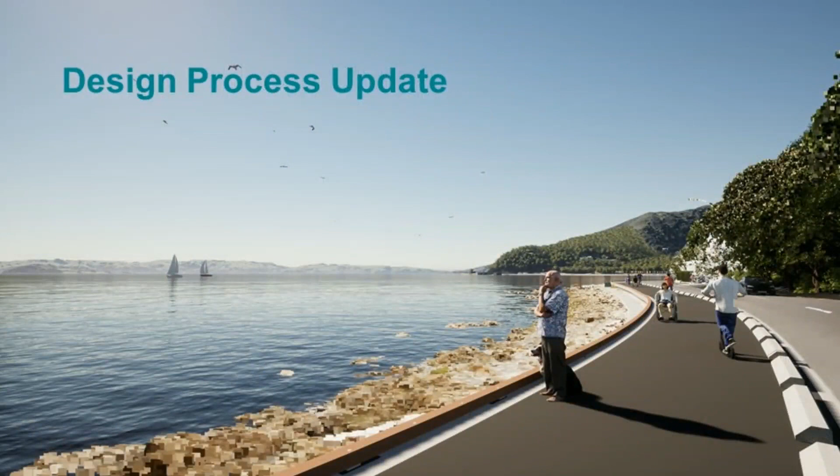That's really been an evolution of the consent design, which many of you are probably familiar with. Most of what we've done is in the engineering detail that sits under the ground, how we make it all stand up, how we make it work, and how we build it. So most of what we've done is probably invisible, even though a lot of hard work's gone into it.

But I just thought I might highlight some of the things that you might see that could be slightly different to what you had seen previously. One thing we've done, it's not super clear in this picture, but we've got a much larger landing between the levels of the wall now, and that was around providing safety from falling. The idea was it reduces the need for balustrades and increases safety for users, so they don't have as far to fall.

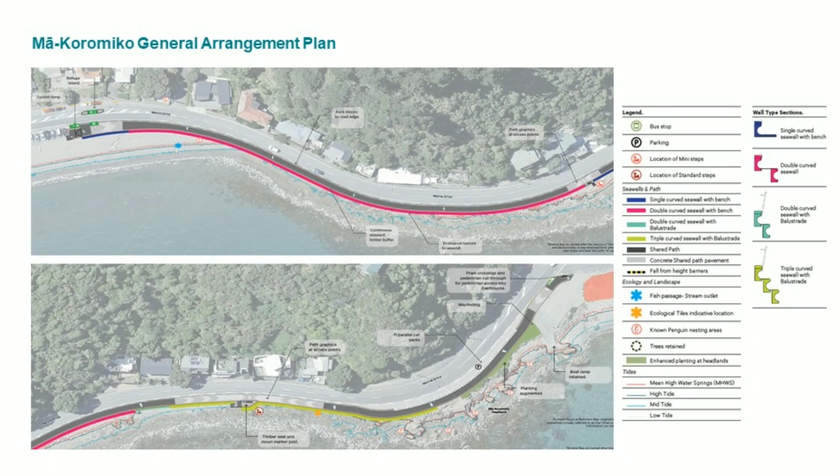These plans are now, or very shortly will be, going live on the Hutt City Council website - the more detailed plans that sit within that urban design plan. You can look a bit more closely at the design for those two bays in your own time, because this is obviously a bit hard to read. So either now or very soon they'll be up - they are now, they're on the Hutt City Council website. That's the update from design, and I'm going to pass over now to John.

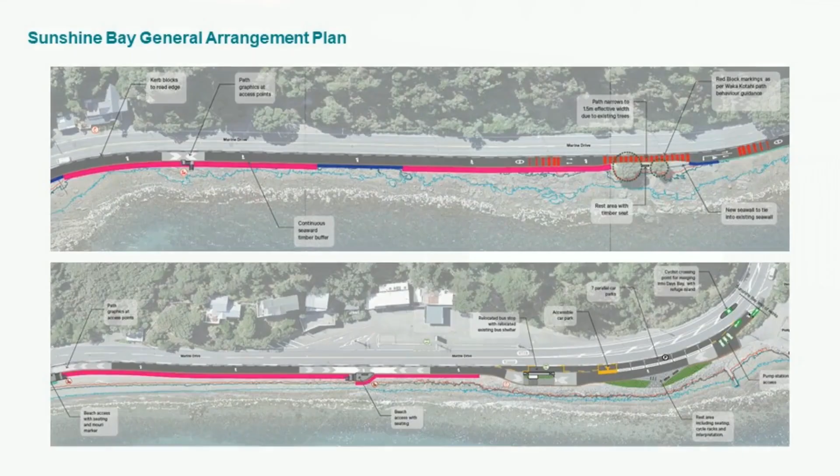Kia ora koutou. For those of you who don't know me, I'm John Kingsbury, Head of Transport at Hutt City Council. Just before I talk about this, I want to acknowledge the experts in the room.

The alliance that's been put together for both Tupua Horo Nuku and Te Ara Tupua is amazing. We've got the best of the best people, the real experts on this, so couldn't be prouder to be associated with either of those projects, with such great people involved.

I'm going to talk a little bit about the resilience benefits of this. Very topical, obviously, and I recognise a few faces from last week around the corner when we had a climate change event. The project will improve the resilience of Marine Drive through the new seawalls, and some of you may have seen the wave testing a month ago or so, which we can talk about a bit later if anyone's got questions. But basically pushing the waves back out rather than bringing them in.

The new seawalls will be less prone to damage in comparison to what's existing. Also have the potential for future resilience upgrade. We know climate change is real, obviously, and we know resilience is a key thing along the eastern bays. So it's not going to solve everything, but it will help, and it's a starting point.

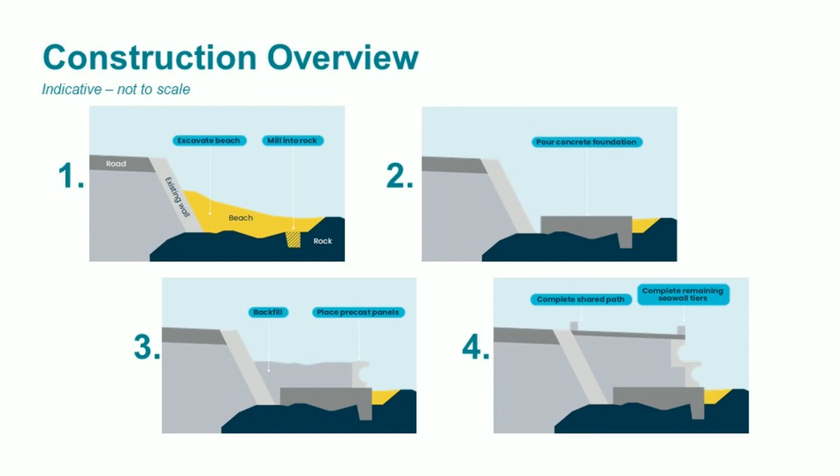So we've got an unreinforced concrete foundation that we pour into that, and on top of that we have the precast units that Michael mentioned earlier. They go in the front, they give us our temporary formworks, our permanent formworks, and a nice finish on the face of the wall, and again more concrete in behind that. Once we're up close to the level of the existing road, we slap a pavement on top of it, and that's pretty much job done for us.

So how are we going to do this? This job's really easy to build if it was in a field, it's just a big concrete slab. But we're stuck between a pretty gnarly marine environment and Eastbourne's only road access.

So we're going to be setting up a permanent lane closure throughout the duration of the job. The lane closure is going to be anywhere between 200 to 300 meters long, and this gives us space to work our lifting machinery, our concrete trucks, our delivery trucks for the precast. So we're going to be skinnying up the traveling lane down to about 2.75 meters, whatever we need to do to get the buses through.

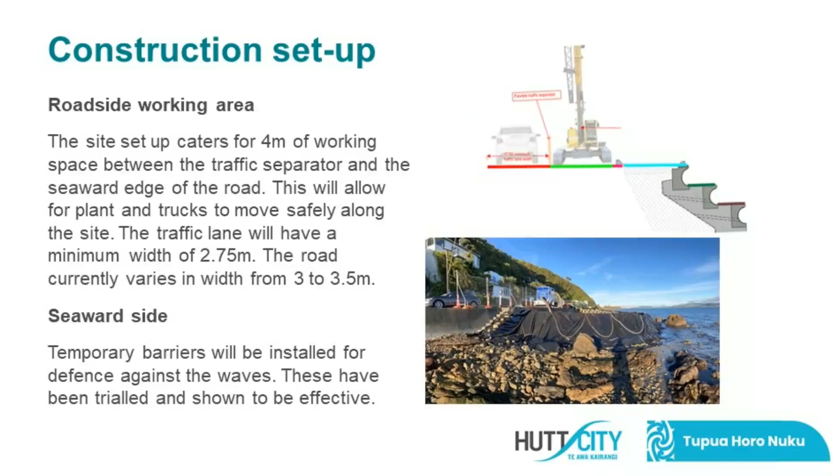Out on the seaward side, we're going to be using a temporary barrier that we're bringing up from Christchurch. The intention is to dampen the wave action and give us as dry a site as possible so we can build this thing as quick as possible.

The traffic management - as you'll see on some of the cheat sheets knocking around, during peak times and working times, the traffic management is going to be manned, so we'll be able to manage the ebbs and flows of the traffic depending which way they're going. Outside of those working hours and outside of those peak times, they're going to be automated signals.

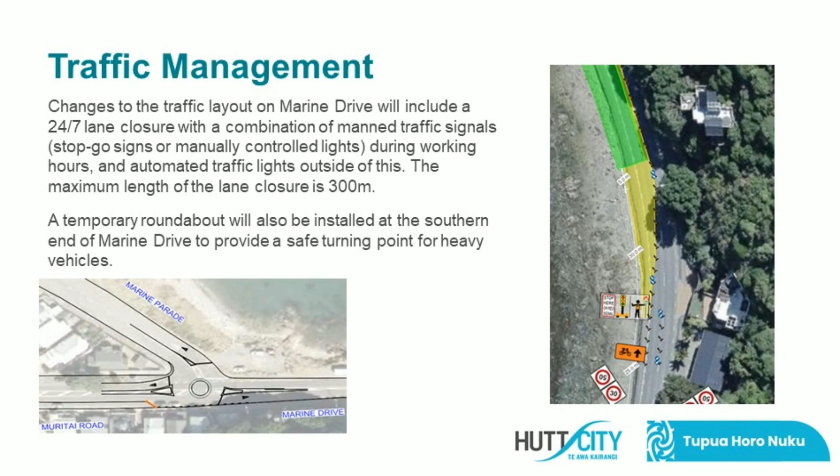To help us get our trucks turning around and we don't have to drive through Eastbourne, we're going to be installing a temporary roundabout at the junction of Marine Drive and Marine Parade at the north end of Eastbourne. That stops us having to drive trucks into Eastbourne because there's nowhere to turn around otherwise.